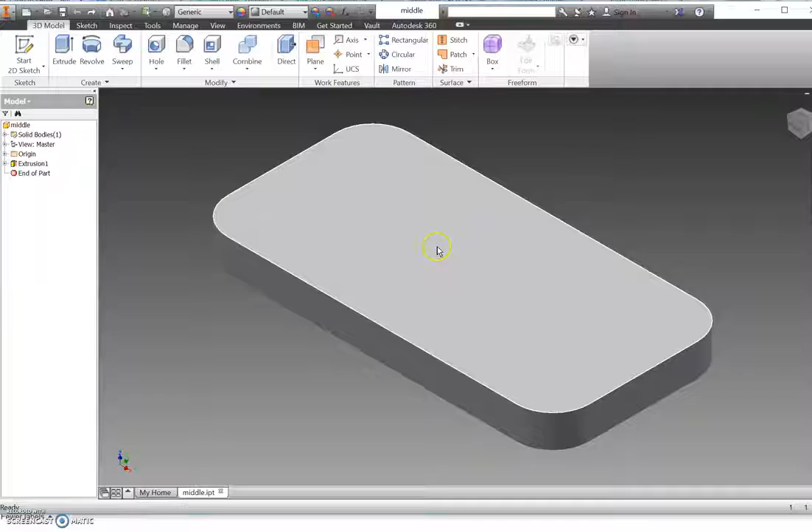Okay, the next step that I want to do, I want to put a new sketch onto this surface here. So right click on that face and then new sketch. Now this is my middle piece, and the way that I know that it's my middle piece, I can see the tab open up down here, and I can also see the tab opened up at the top.

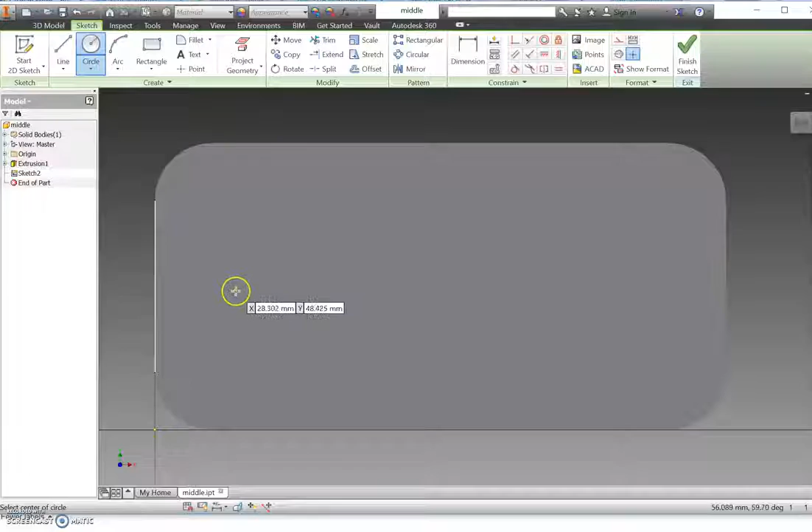So I'm going to start by putting two circles. So from here, as I hover over this line, you get towards the centre and the node actually turns green. And then we know from that point we get the dotted line coming out. That way we're in the centre of our project. So to start this circle, left click and then drag it out, and you type in 50 and enter.

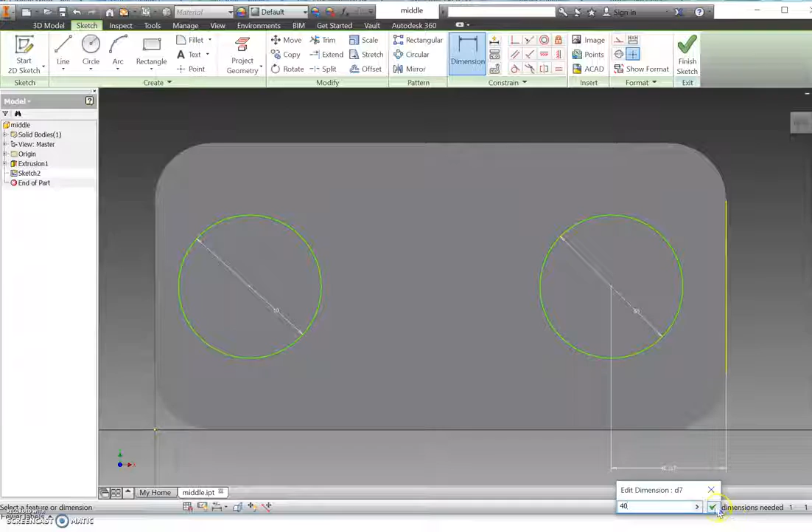And I'm going to do the same thing down this end. You can see I get the dotted line straight away. And 50 millimeters, enter. I'm going to put a dimension on here, so general dimension from this line here to the centre of the circle. I want that to be 40 millimeters. And this design's up to you. You can modify it if you like. 40 millimeters.

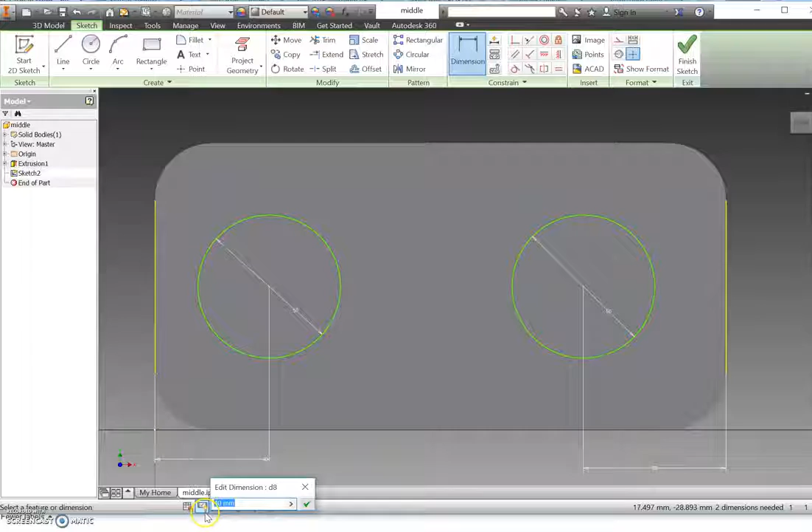If you wanted to change that, you could double click and then update it just so you can have a little bit of a look. It's very good to design with Autodesk because it means you can make changes very quickly and then see whether or not you like them. I think I'll take it back to what I had, the 40 millimeters.

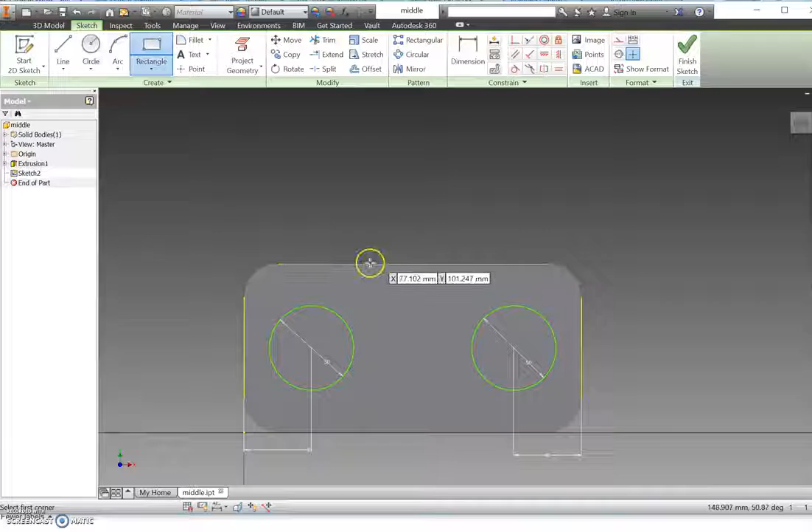And now I also need to make a little cut in the top where my iPod's going to sit. So I'm just going to use rectangle tool and just making sure I'm starting on the line at the top. We'll just use project geometry, so we'll just select that line, and now that means that we can start and make sure it clips onto that line. I need to go out 70 millimeters for my iPod. Your iPod size might be different, and then I want it to go down 15 millimeters.

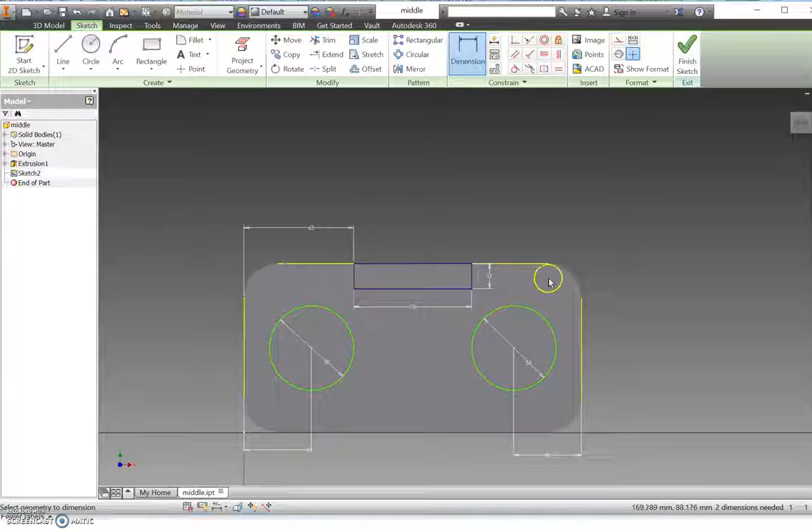Then I'm going to need to create a general dimension from this line to this line of 65 millimeters, and you're going to have to work this out mathematically so it sits in the center. The next thing I'm going to do, I'm going to draw a line, say from this point across, and it can just go straight past. And same thing here.

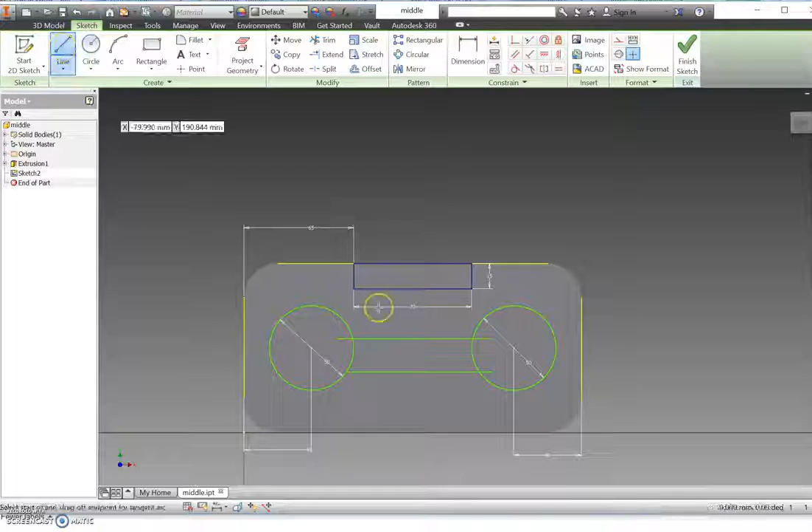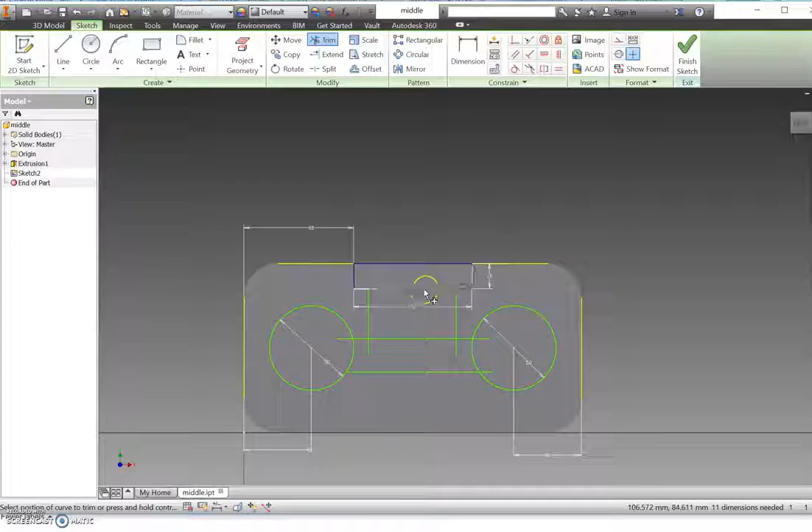And this one I'm going to create, I'm just trying to create a pathway for the sound to travel. Just a little bit of freehand. And then we can use a trimming tool just to go through and trim off any pieces that we don't need. So we're going to end up with a shape like that.

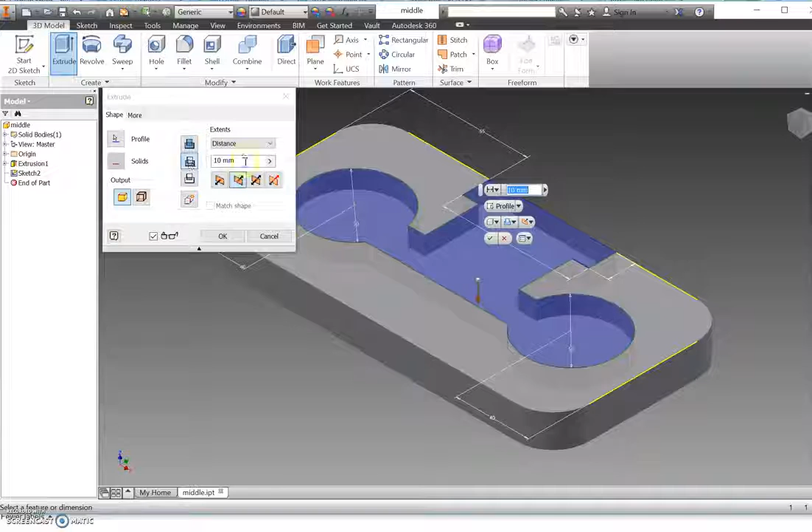Right click, finish sketch. Right click, extrude. And we're going to be cutting away the material, so when we hover over that, it gives us what it's going to do. So we want to cut, and we're going to be cutting through a distance of 18, because our material's 18 millimeters thick. And then we go OK.

There's a little bar over here, we turn that so that's what it's looking like. And just to save, to update our middle piece, and we click on here to the front, and that's what it's going to look like from the front.